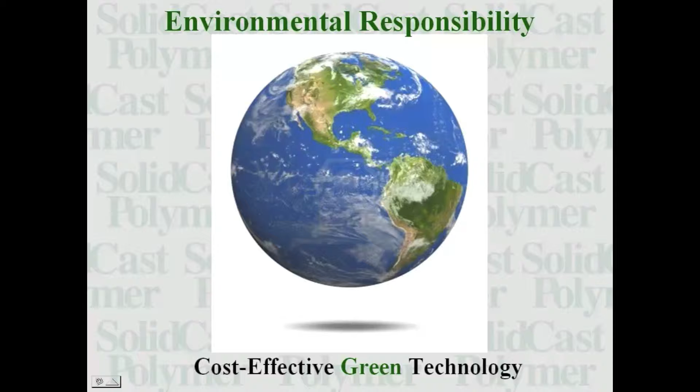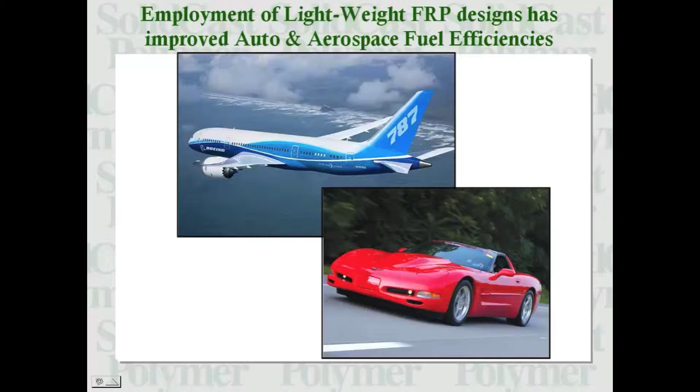In the past decade or so, there has been significant focus on caring for and cleaning up our environment. Government agencies are mandating more stringent regulations on major issues like air emissions and fuel efficiencies. Our composites industry has contributed much to helping meet our lofty environmental goals. The employment of lightweight FRP designs has greatly improved both automobile and aerospace industry fuel efficiencies, while giving rise to an eco-friendly wind energy market. I'd like to note that these industries have benefited greatly from the growth of carbon fiber technology, for example, Boeing's 787 Dreamliner.

Ironically, these same FRP materials, offering countless energy and environmental benefits, have looming issues regarding disposal and reclamation. It is estimated that the global fiberglass output will exceed 4.8 million tons by the end of 2013. It's also projected that of that 4.8 million tons, approximately 400,000 tons of composite waste will be generated from manufacturing processes. And these estimates don't include existing FRP products reaching their life expectancy and design limitations.

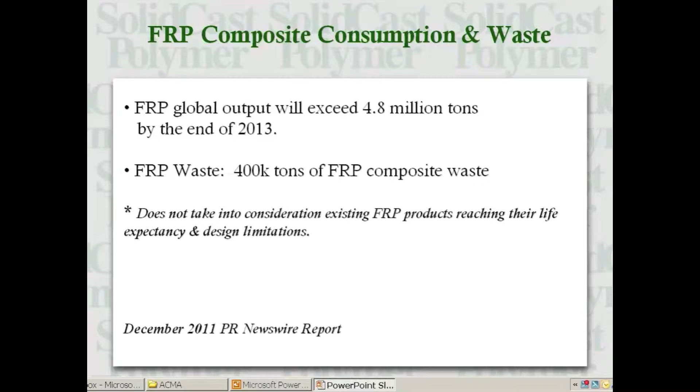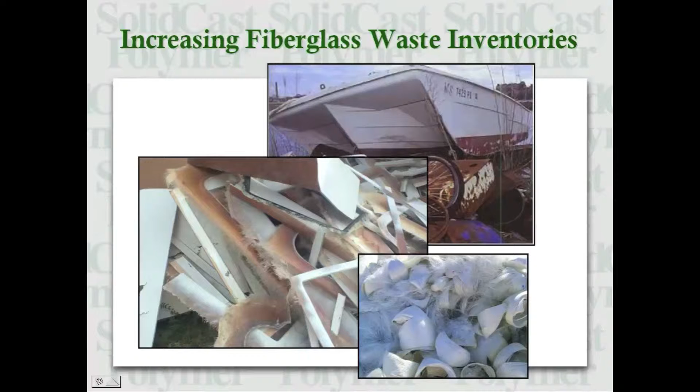Faced with growing sustainability concerns regarding increased hazardous landfill costs and overburdening waste fiberglass inventories, FRP manufacturers are looking to recycling and reclamation as a solution. As in the development of all new and progressive technologies, the greatest driver or motivation for recycling FRP will always be cost. For example, there are disposal costs, which include transportation and landfill expenses, and opportunity costs, which are the scrap materials that could have been used to produce sellable products.

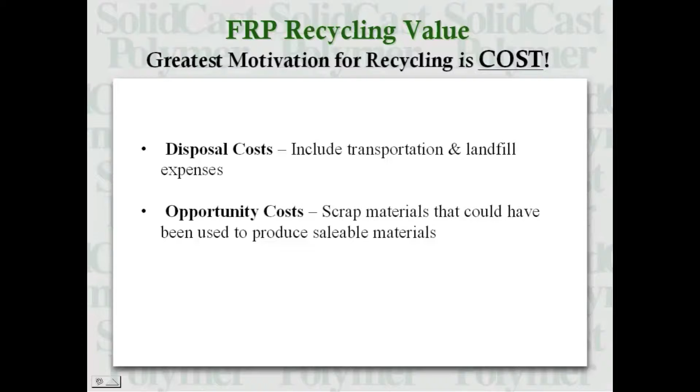Presently, the three most common types of FRP recycling processes are mechanical shredding, incineration, and reclamation harvesting. The mechanical shredding method produces inconsistent reclaimed fiber sizes, resulting in inconsistent physical properties. While incineration is a very expensive process with high capital equipment costs, this process burns off resin, but can also degrade the physical properties of the fibers.

Reclamation harvesting, on the other hand, is a more reliable and consistent method of recycling FRP. It eliminates damage to the fibers from extreme temperatures and maintains more consistent sizing, which helps preserve the fiber's original physical properties. With respect to reprocessing and reusing recycled FRP, reclamation harvesting seems the most viable process.

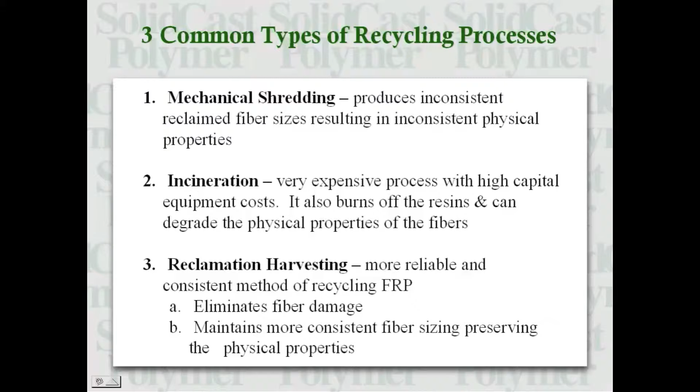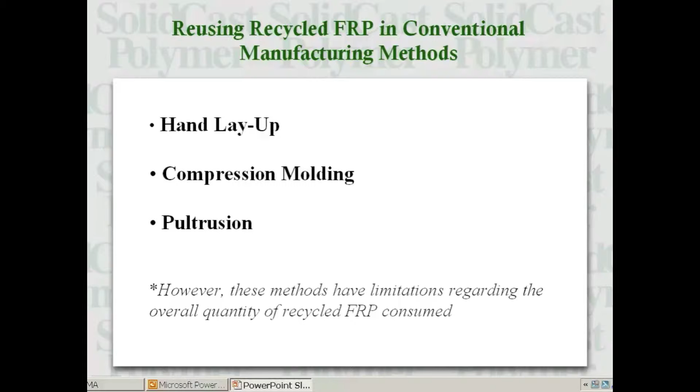The big question is, what do you do with the fibers once they've been harvested? Presently, recycled FRP can be used in various fiberglass manufacturing processes such as hand layup, compression molding, and pultrusion, just to mention a few. However, these methods have limitations regarding the volume of recycled FRP consumed, as conventional fiberglass methods consume relatively small volumes of recycled FRP.

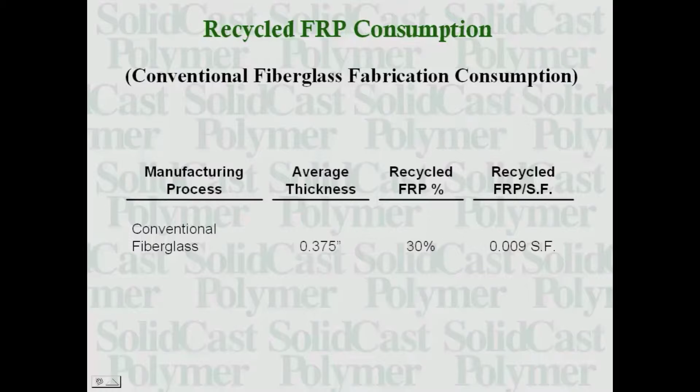One economical and effective method of consuming larger volumes of waste FRP is to exploit the reclamation harvesting method and incorporate reclaimed fibers into solid cast polymer composite systems. This slide illustrates that conventional fiberglass components consume a greater percentage of recycled FRP waste than does solid cast polymer. However, based on a similar square area, solid cast polymer products consume a greater volume of recycled FRP because it's typically produced in greater thicknesses.

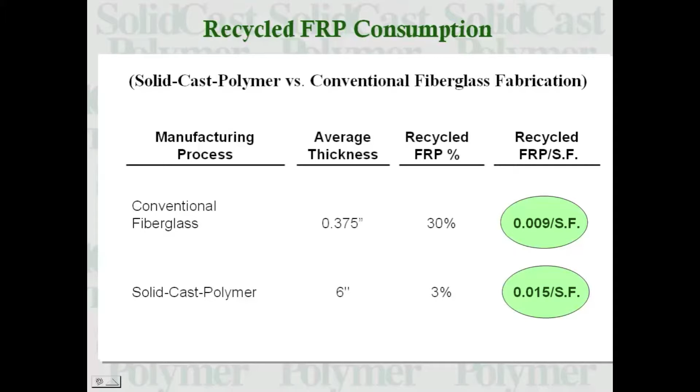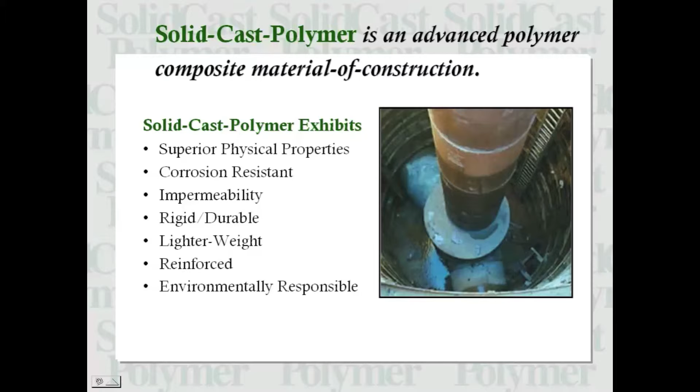So what is a solid cast polymer composite system? Solid cast polymer, or SCP as we refer to it, is an advanced polymer composite material of construction that exhibits superior physical properties, corrosion resistance, and a multitude of other features and benefits. However, one of its most important qualities is its environmental value. SCP is a concrete-like material made from chemically inert mineral fillers such as quartz and silica sand, thermosetting polymer resins, and select reinforcing media in the form of recycled FRP fibers. Other than the quartz silica based aggregates, which make up approximately 90% of the SCP, the two key components in the solid cast polymer matrix are the resin and recycled FRP.

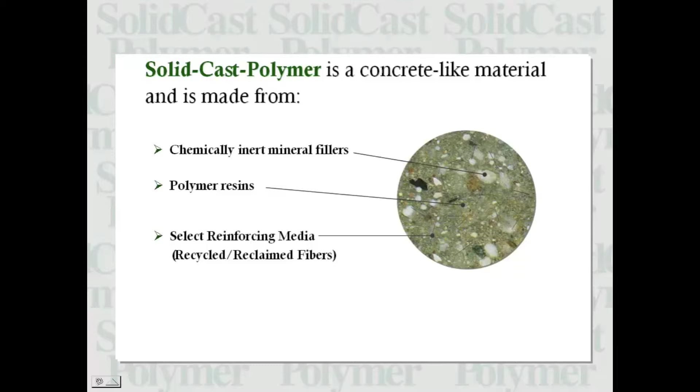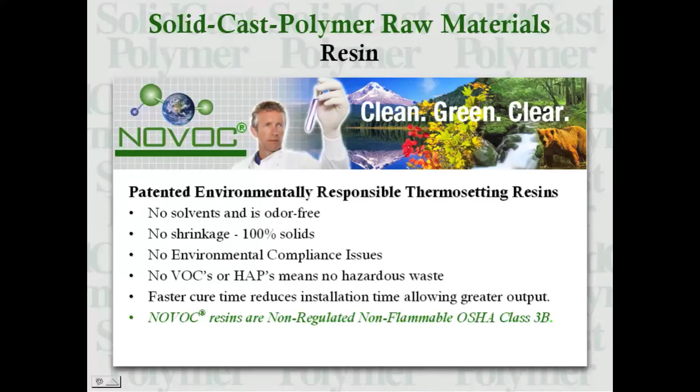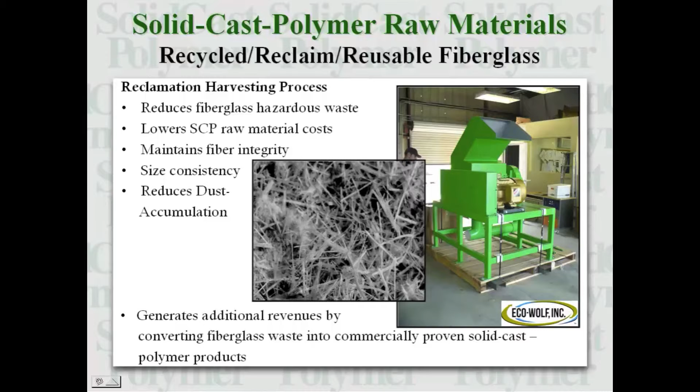The SCP resin is a patented environmentally responsible resin system that does not contain volatile organic compounds or hazardous air pollutants. It's highly productive as it initiates faster curing, which increases output, and this resin system is non-flammable. The FRP reclamation harvesting process not only helps reduce fiberglass waste, it lowers overall SCP raw material costs while maintaining fiber integrity and size consistency. More importantly, this process helps generate revenues by converting fiberglass waste into commercially proven solid cast polymer products.

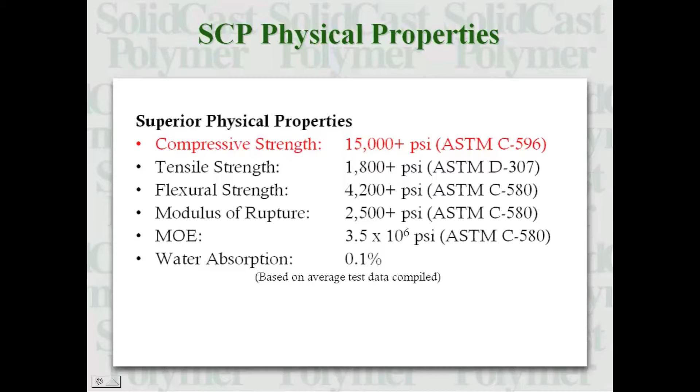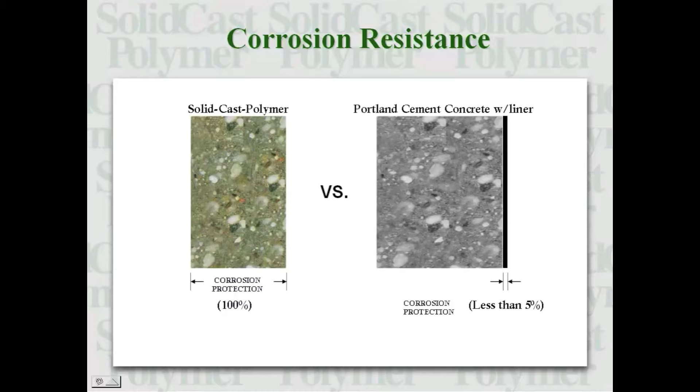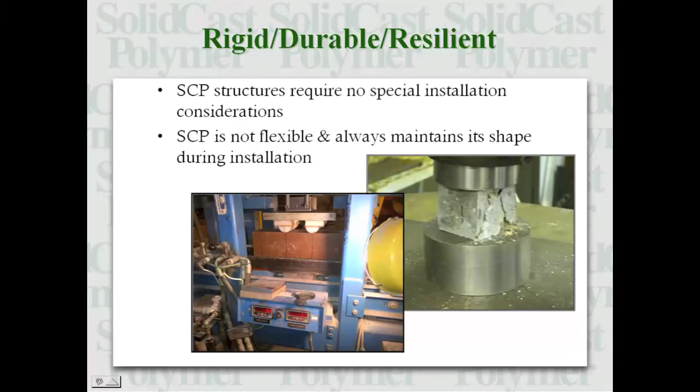Solid cast polymer exhibits superior physical properties. For example, Portland cement concrete has a compressive strength of 3,000 to 5,000 psi. SCP is completely corrosion resistant through and through versus Portland cement concrete, which needs thin liners and protective coatings. SCP is virtually impermeable while completely encapsulating the hazardous waste FRP fibers and resin. Solid cast polymer is rigid, durable, and resilient, and can be reinforced with various materials such as rebar, which facilitates lighter weight structures.

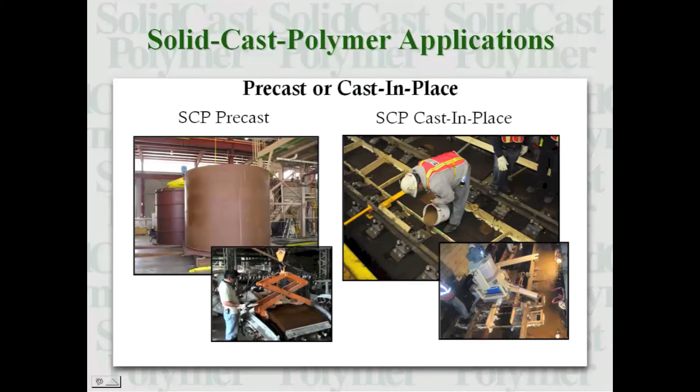Solid cast polymer products can be installed using two basic methods of construction. SCP can be precasted, and SCP can be cast in place. Solid cast polymer products also have a broad market appeal, as these systems have been in use in one form or another for over 30 years.

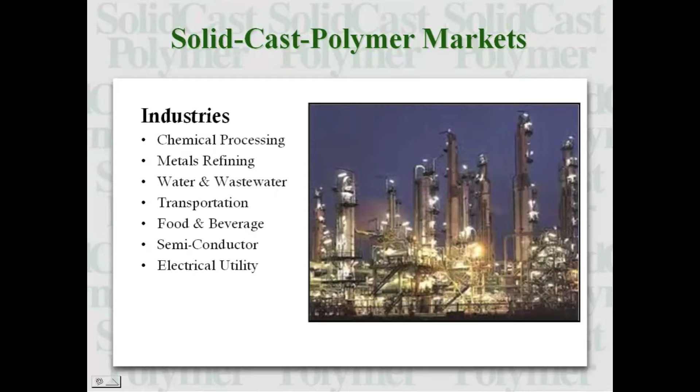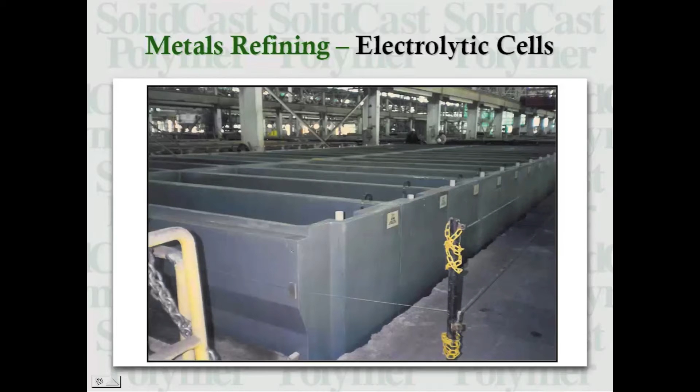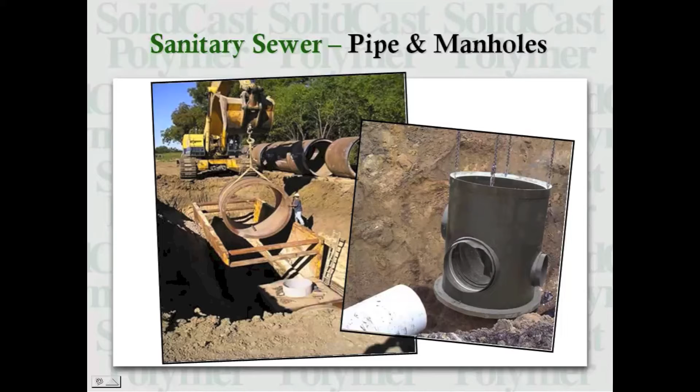SCP products can be used to contain corrosive chemicals like acids and caustics. They can be used in the refining of basic metals such as copper and zinc. But to date, its strongest market appeal has been in the sanitary sewer market, providing large diameter pipe, manhole structures, and tunnel lining systems. Still, a key and emerging solid cast polymer market is transportation and the replacement of creosoted wood and Portland cement concrete railroad ties. In this application, SCP demonstrates great strength, durability, and wear resistance.

This is a photo of a light rail subway system in New York City. Please note that the light rail systems do not have long railroad ties that span from one rail to the other. They incorporate shorter ties they can embed with Portland cement concrete, or in this particular case, solid cast polymer grout.

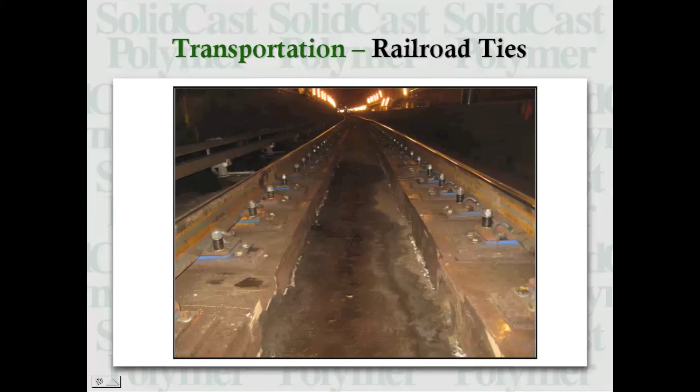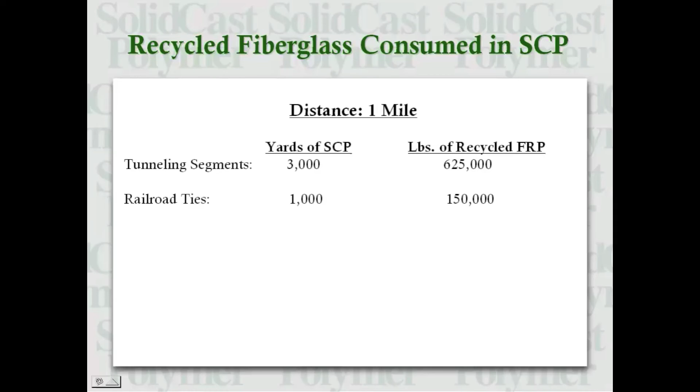Solid cast polymer has many features and benefits, but as it relates to the utilization of recycled FRP, its greatest benefit is its consumption of large volumes of waste FRP fibers. This slide illustrates the volume of solid cast polymer and recycled FRP used in a 1 mile span of two separate solid cast polymer projects. As you can see, SCP can consume vast quantities of recycled fiberglass.

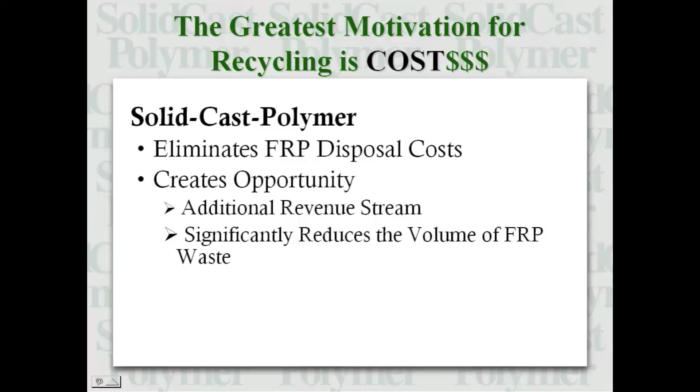Remembering that the greatest motivation for recycling is cost, we can conclude that solid cast polymer is emerging as a significant cost-effective alternative technology for recycled FRP while always remaining environmentally responsible.